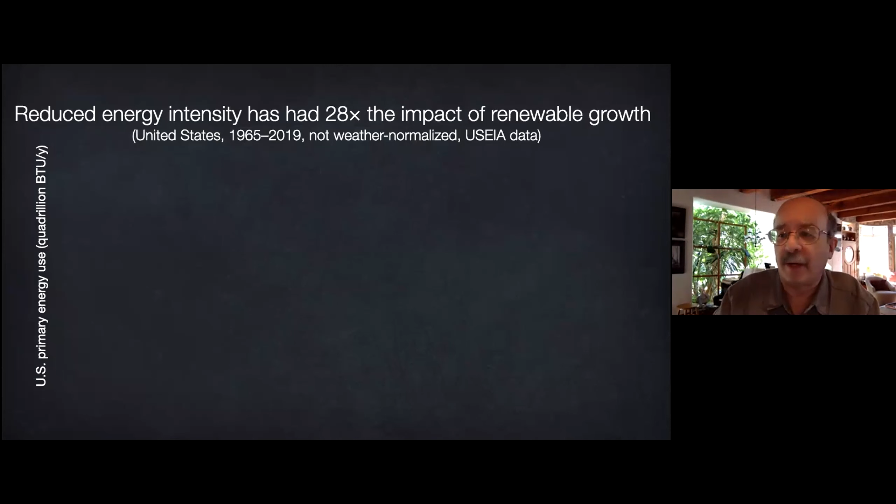For example, if the United States' total primary energy demand had kept growing in lockstep with GDP since 1975, we would have used this much energy. Instead, we cut that use by more than half, saving cumulative energy equivalent to 25 years of current use. Meanwhile, renewable energy output doubled, yet with 28 times less cumulative impact than the savings.

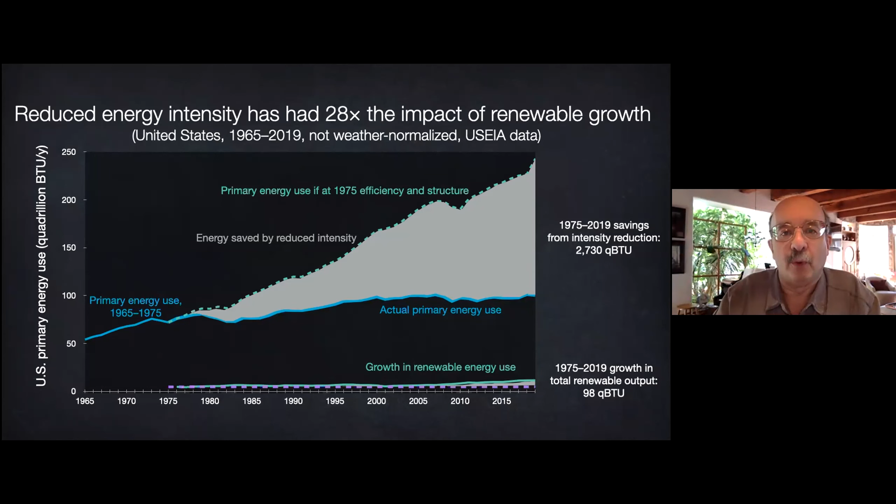Renewables get virtually all the headlines because they're visible, while energy is invisible, and the energy you don't use is almost unimaginable. Yet in, say, 2010 to 2016, the world's saved energy avoided 3 times as much CO2 as all the growth in renewable and nuclear output. Another bit of history: around 1975, US government and industry all said that energy productivity—the real GDP produced per unit of primary energy used—could never go up.

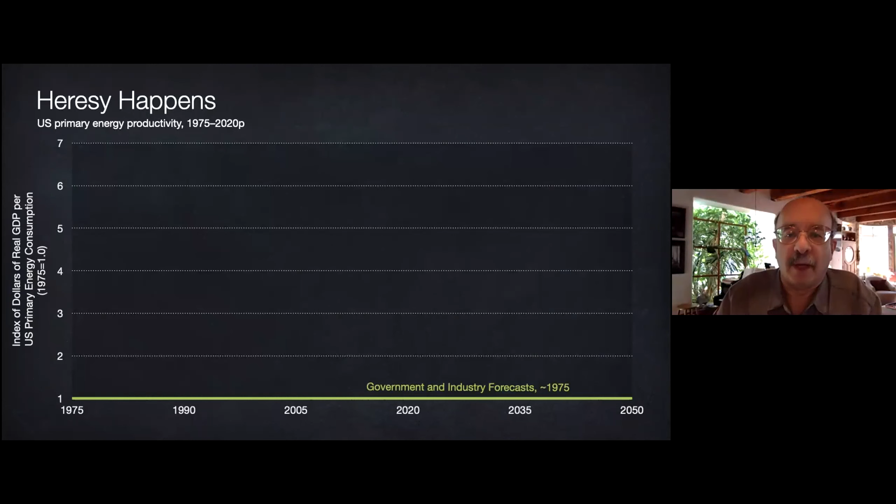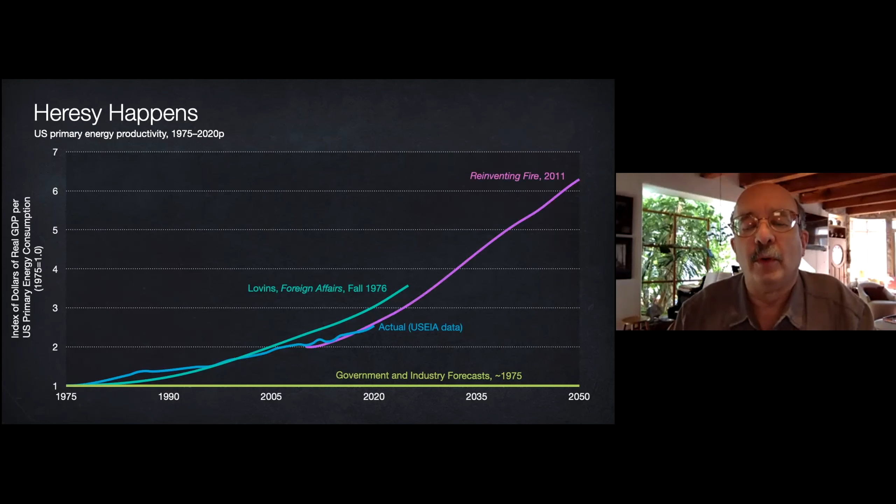A year later, I heretically suggested it could rise 257% in the next 50 years. So far, it's risen 154% in 44 years. Yet just the innovations already added by 2010 can raise energy productivity by another threefold, twice what I originally thought, at a third the real cost.

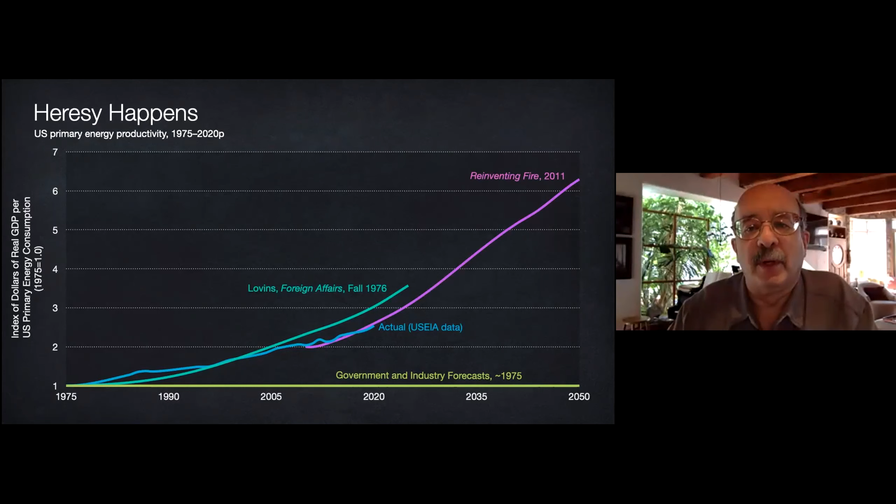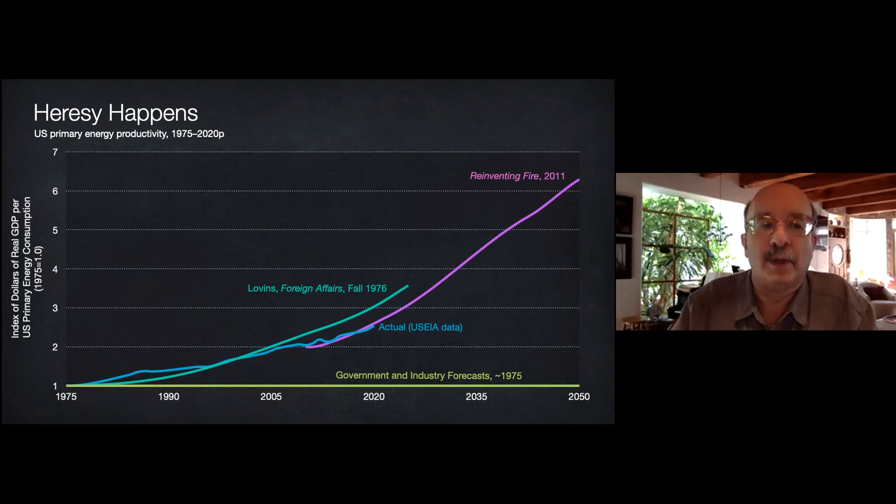And today that's looking conservative because optimizing buildings, vehicles, and factories as whole systems, not as piles of parts, can often make very big energy savings cost less than small or no savings, turning diminishing returns into increasing returns. This paper, free online—just search on the title with a fun 4-minute video abstract—explains why making energy savings several-fold bigger can actually cost less, because it uses not more but fewer devices, and not fancier but simpler devices, more artfully chosen, combined, timed, and sequenced.

Metal ore bodies and oil reservoirs are finite and depletable assemblages of atoms, but energy efficiency resources are infinitely expandable assemblages of ideas, depleting only stupidity, a very abundant resource. A few examples.

My wife Judy and I live here at 7,100 feet elevation in Old Snowmass near Aspen, Colorado, where temperatures used to dip as low as minus 47 F, and we've seen 39 days of continuous midwinter cloud. But our house does no combustion.

That's so 20th century. Super insulation, ventilation, heat recovery, and big super windows insulating like 16 or even 22 sheets of glass, but looking like 2 and costing less than 3, make this building 99% passive solar heated, 1% active solar. Super efficiency added less construction cost than eliminating the heating system subtracted.

So we saved altogether 99% of space and water heating energy, 90% of household electricity, and half the water, altogether with a 10-month payback in 1983.

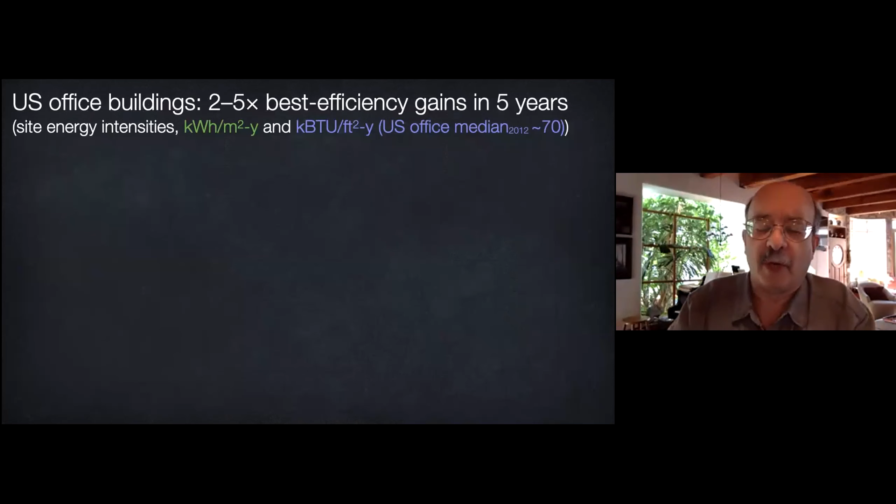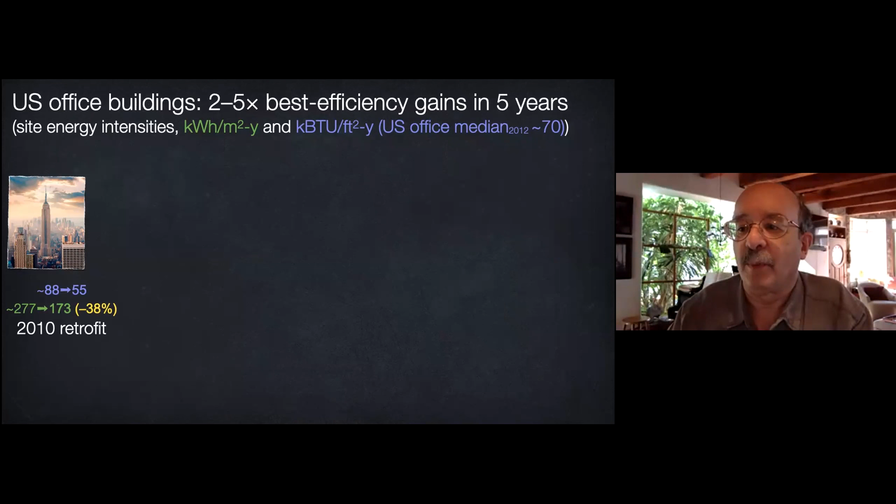We used integrative design in 2010 to retrofit the Empire State Building, saving 38% of its energy, later 43%, with a 3-year payback. This was considered pretty good until 3 years later, our cost-effective Denver retrofit saved 70%.

The Denver retrofit made the century-old federal complex more efficient than what was then the best new US office, which in turn is only a third as efficient as RMI's passive net positive, no mechanicals innovation center 10 minutes from here.

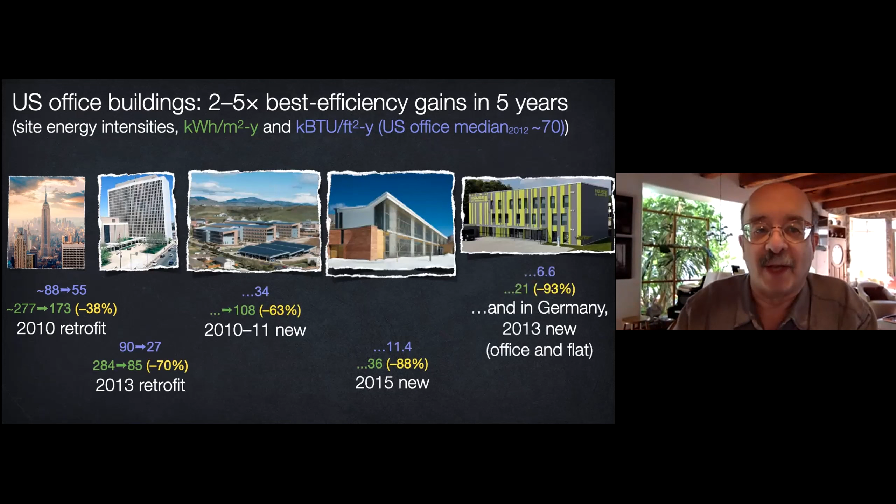And now there's a Bavarian building using 2/5 less than ours. So its 3 stories are powered nearly 5 times over by just its rooftop photovoltaics. Yet all of these technologies existed over a decade ago.

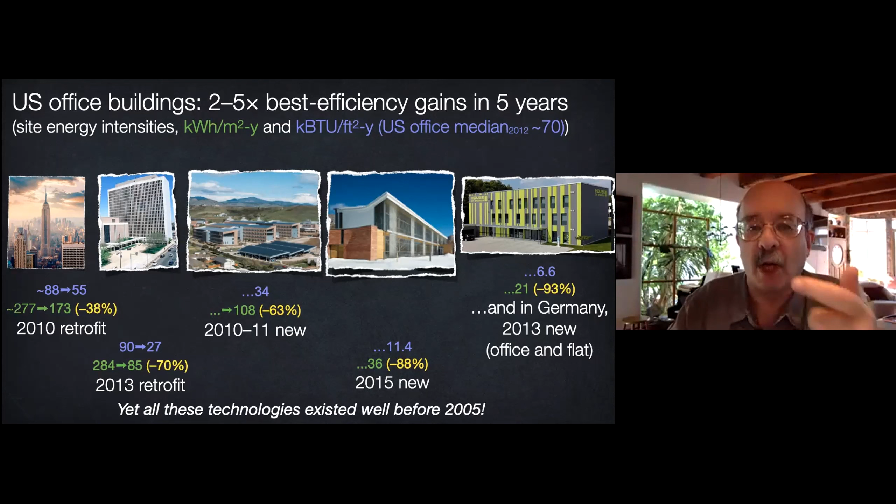What's mainly improved, doubling new and old offices' potential efficiency targets in 5 years, is not technology so much as design, the way we choose, combine, time, and sequence technologies.

So how did our retrofit save 2/5 of the Empire State Building's energy? Well, remanufacturing its 6,514 windows on site in a temporary window factory set up on a vacant floor into super windows that pass light but block heat, plus better lights, office equipment, air handlers, and so on, cut the maximum cooling load by a third.

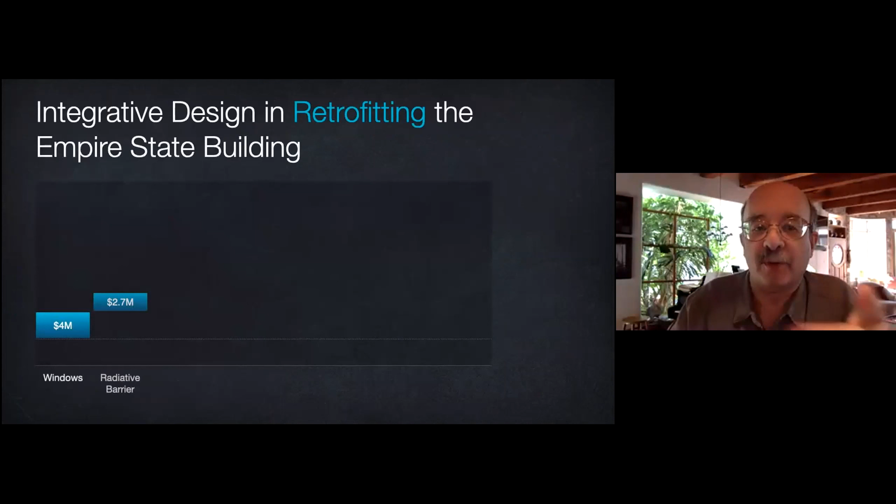Then renovating smaller chillers instead of adding bigger chillers saved $17 million of capital costs, paying for most of those improvements and cutting the payback to 3 years, or under 1 year if we had counted non-energy benefits to the owner or tenants.

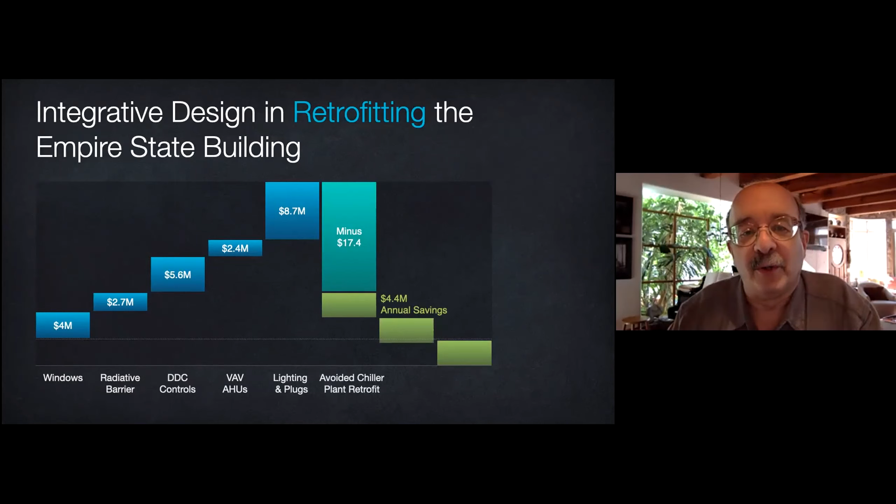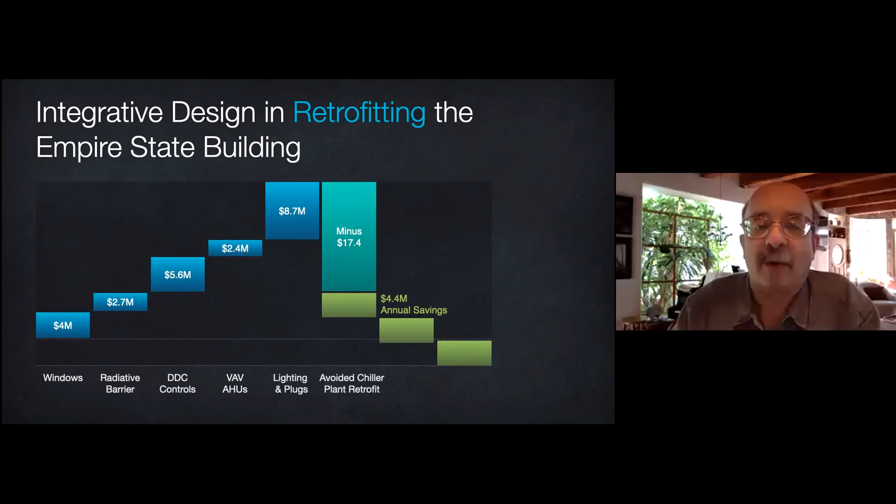A big energy service company using disintegrated design had offered the same 3-year payback with only a sixth the savings we got. They lost the bid. And now the owner is going back with even better integrated design to save another 40%.

Of the 20 most efficient commercial buildings in North America, RMI's Innovation Center, you just saw, was the most efficient in the 2 coldest climate zones, using 1/6 of the median US office energy.

It keeps people cooled by 11 and warmed by 10 passive methods, none of which blows hot or cold air at you. My favorite space is the 270 square foot negamechanical room, where I want to sneak in one night and outline on the floor in yellow industrial tape, like bodies at a crime scene, where the boilers and chillers were supposed to go before we designed them all out.

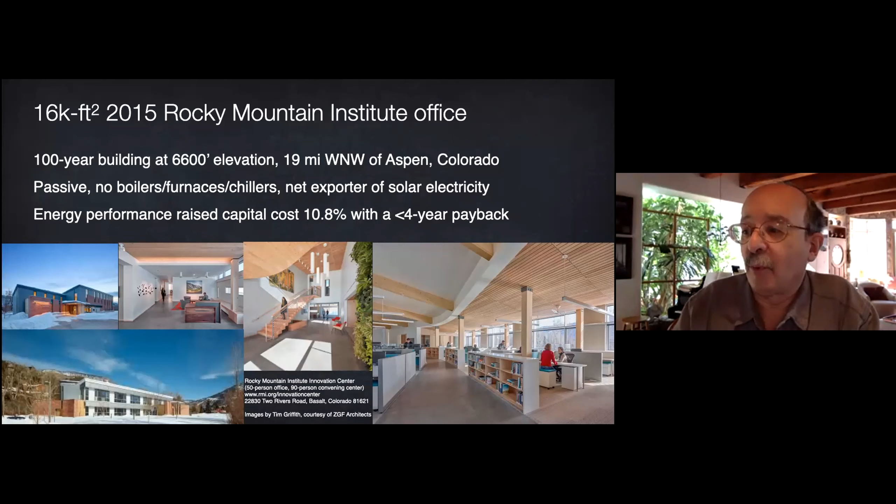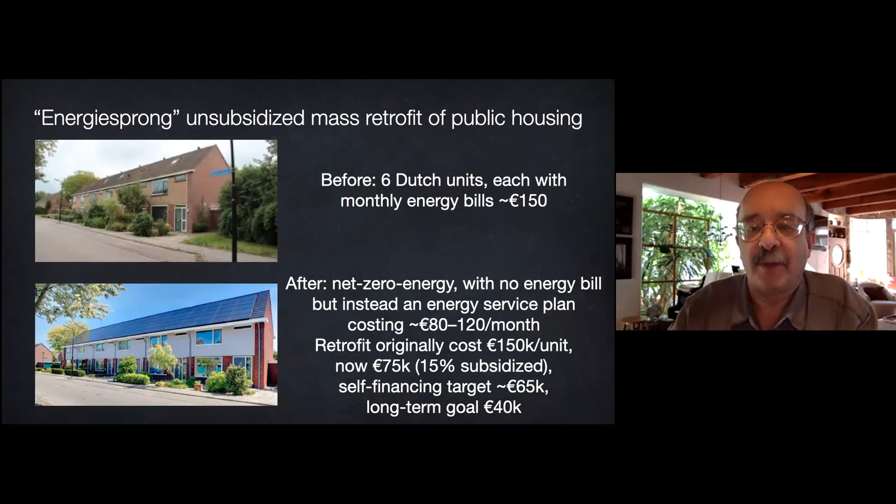RMI's Realize collaboration with DOE and California Energy Commission is adapting such methods to the US, starting in California and Massachusetts. In muggy India, Rohan Parikh's team built 1.5 million square meters of offices using 80% less energy than normal.

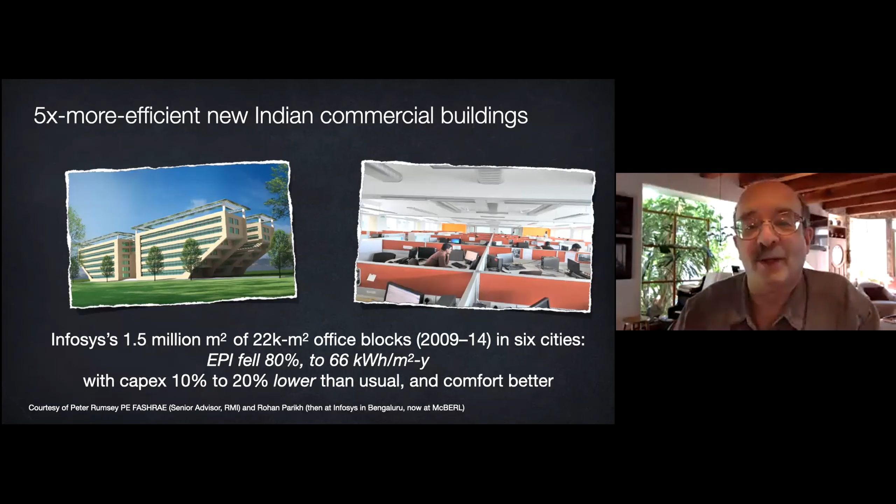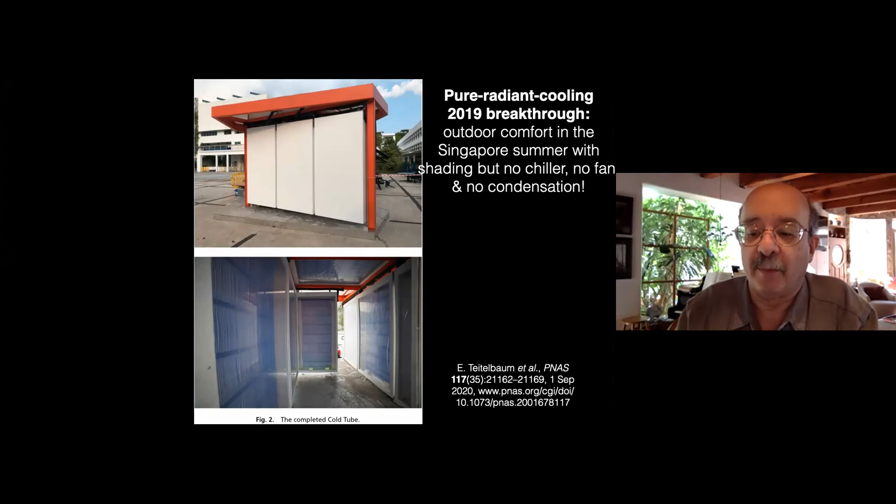About a decade after those buildings, new techniques are emerging. For example, purely radiative cooling can keep people comfortable outdoors in humid Singapore at 90+ Fahrenheit without moving, drying, or cooling the air. In a shaded, open-ended pavilion like a bus stop shelter, this experiment cooled people just by absorbing far infrared radiation from their bodies into vertical panels cooled by surface tubes circulating slightly cooled water. To prevent convection and condensation from ambient air, the front of the panel is shielded by an air gap and a 50 micron polyethylene film, transparent to 82% of the infrared your body radiates.

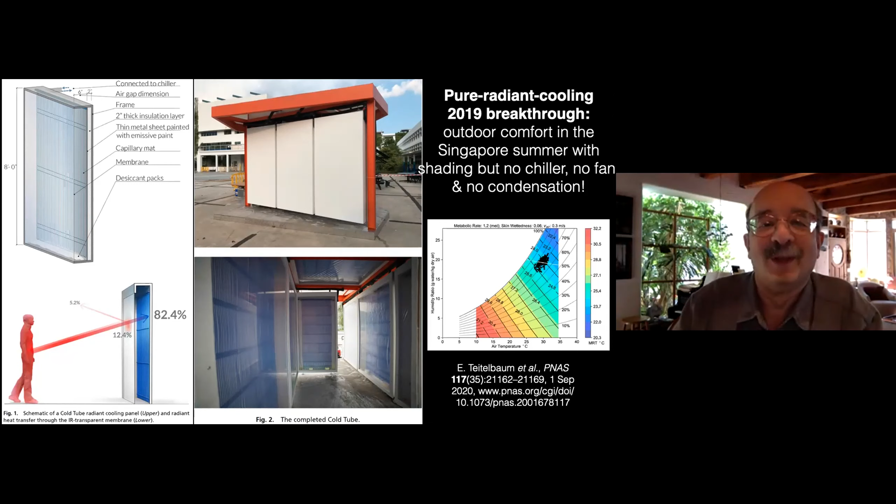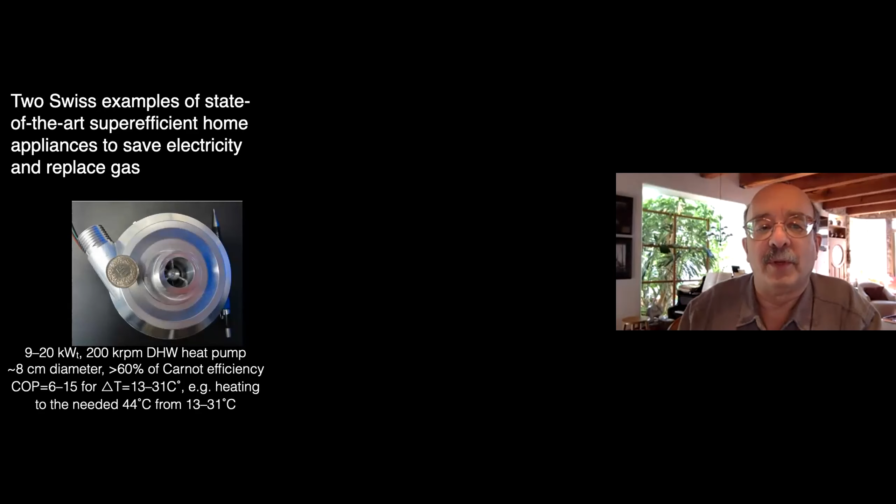What about home appliances, especially to get off gas? This Swiss fist-size high-speed heat pump can deliver 6 to 15 units of hot water per unit of electricity. And this dramatically more efficient, safe, and otherwise superior Swiss electric cooking system uses vacuum insulated pots to cook with 2 to 4½ times less electricity than induction cooktops use.

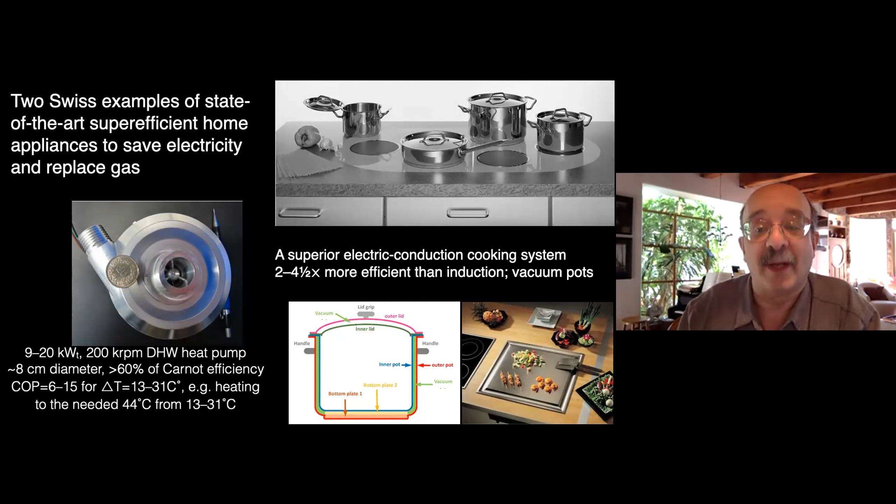In the US by 2050, at historically reasonable speed, buildings which use 3/4 of electricity can become 3 or 4 times more efficient, saving $1.4 trillion net present value with a 33% internal rate of return. So those savings are worth 4 times their costs. And industry can accelerate too, doubling its energy productivity with a 21% IRR.

Indeed, industrial process heat and heavy transport are not uniquely hard to decarbonize, just differently hard, and can even do so profitably, as my new RMI and forthcoming MIT Sloan Management Review papers will show.

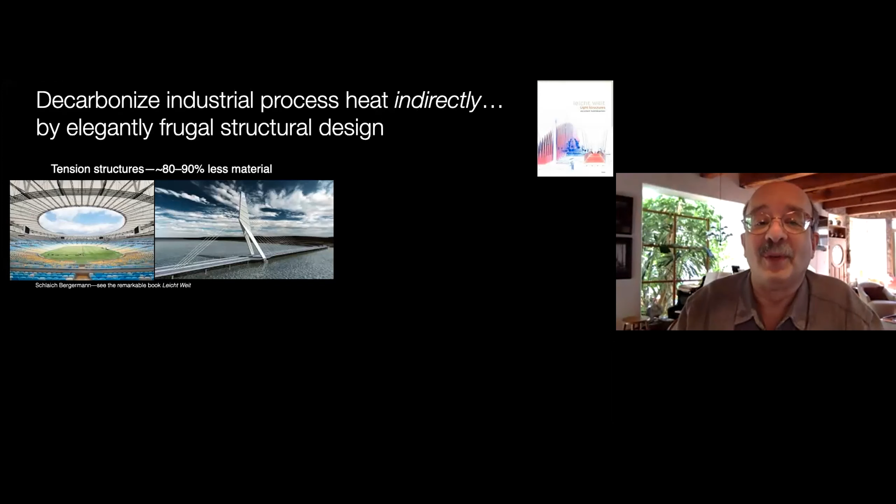Now, industry uses half the world's energy and electricity, dominantly to make stuff. But I found that smarter structural design can profitably save at least half the world's cement and steel that now release 15% of CO2. For example, substituting tension for compression structures typically gives better strength, aesthetics, and cost with about 1/8 the tons. Fabric forms permit optimal shapes that can save over half the concrete in beams, sheets, and other common shapes to deliver the same or better strength and stiffness.

Those weight savings compound because you need less strength to hold up less weight. This folded concrete roof, pre-stressed with carbon fiber, is just 1.6 inches thick, but replaces a 12-inch steel and concrete slab, costs less, and saves 80% of the materials, or 76% redesigned as a floor slab with live loads. It can also help to fit 3 stories with unchanged ceiling height into the vertical space of 2, saving even more structure.

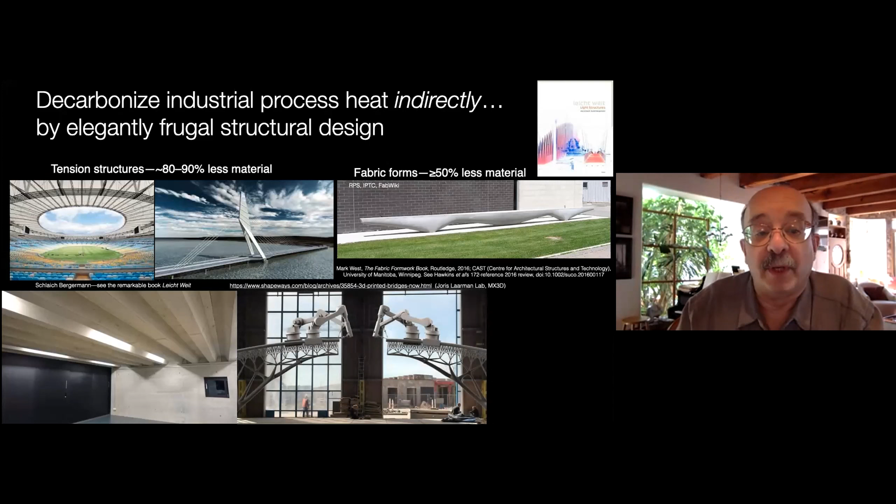This rendering of an airy bridge shows how 3D printing can eliminate most of the weight of concrete structures that mostly support their own weight. This beautiful stainless steel bridge was 3D printed.

Next, substitute natural composites like wood, already in 85-meter towers, planned for 350 meters in seismic Tokyo. Add carbon fiber to save much of the wood or concrete. Apply Taiheiyo's carbon-neutral bamboo concrete, perhaps even adopt carbonate chemistries to make cement a net absorber of CO2.

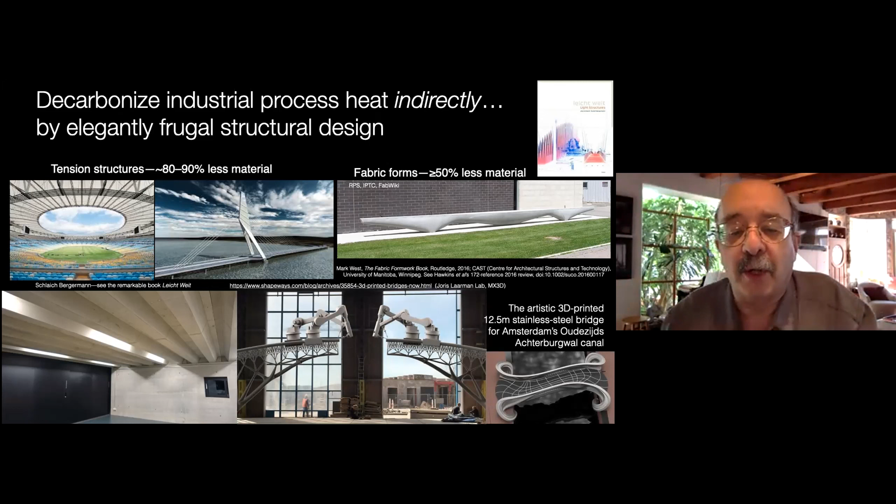Our new build projects generally found about 40 to 90-odd% savings with lower than normal capital costs. These are both across a wide range of old and new industries. Here's one of those data points.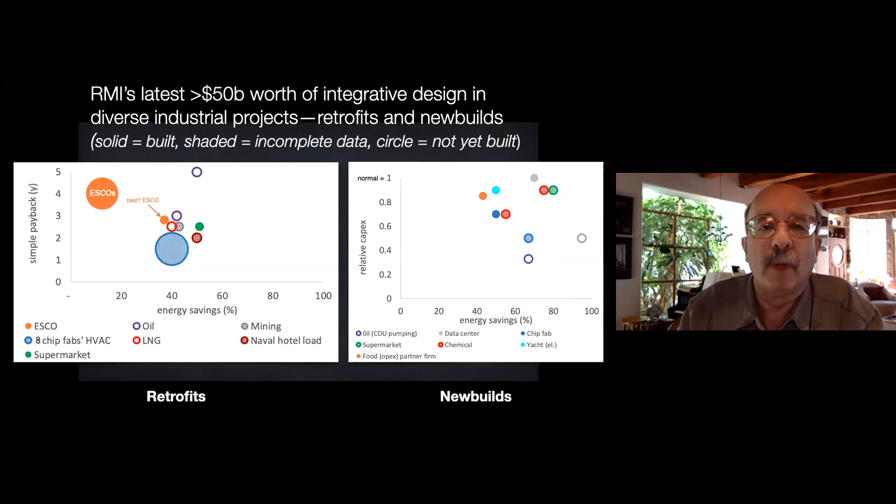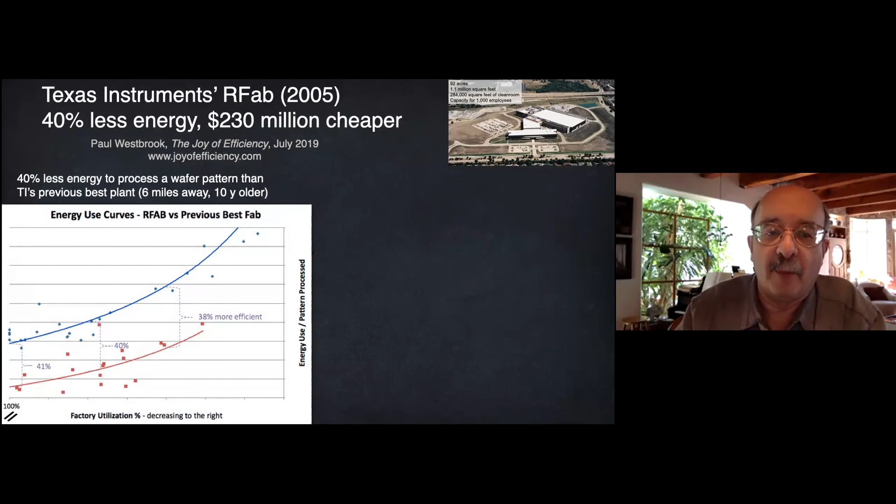Paul Westbrook and I co-led the redesign of Texas Instruments' new semiconductor wafer fab to use 40% less energy with 30%, or $230 million, lower construction cost. So it got built in Richardson, Texas, not in China. Its system efficiencies eliminated one of the 2 utility floors. As of 2017, it had inspired cutting the company-wide TI chip-making energy intensity by 62%, water 56%, greenhouse gases 57%.

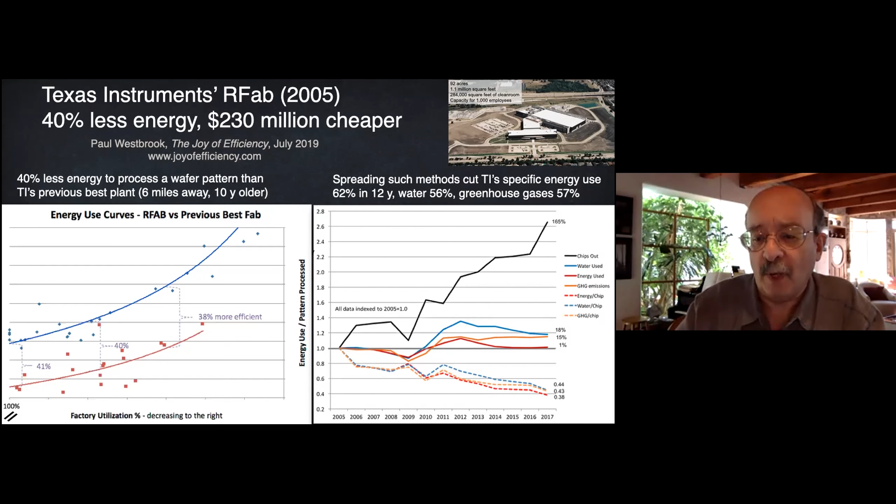RMI's next wafer fab design, by the way, showed how to save about 2/3 of its energy use, not counting tool improvements, and half its capital cost, while replacing all 22,000 tons of chillers with any of 3 natural cooling methods that can yield upwards of 100 units of cooling per unit of electricity.

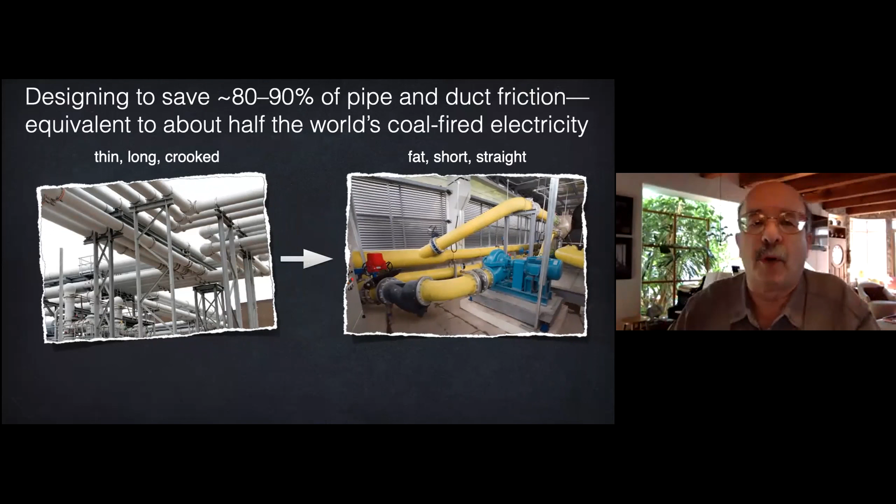Just better pipe and duct design, saving about 80 or 90% of friction and therefore pump and fan power, could, if fully deployed, save roughly half the world's coal-fired electricity, with paybacks typically under a year in retrofit and instant in new build. But this isn't yet in any standard engineering textbook, official study, engineering forecast, industry forecast, or climate model. Why not? Because it's not a technology, it's a design method.

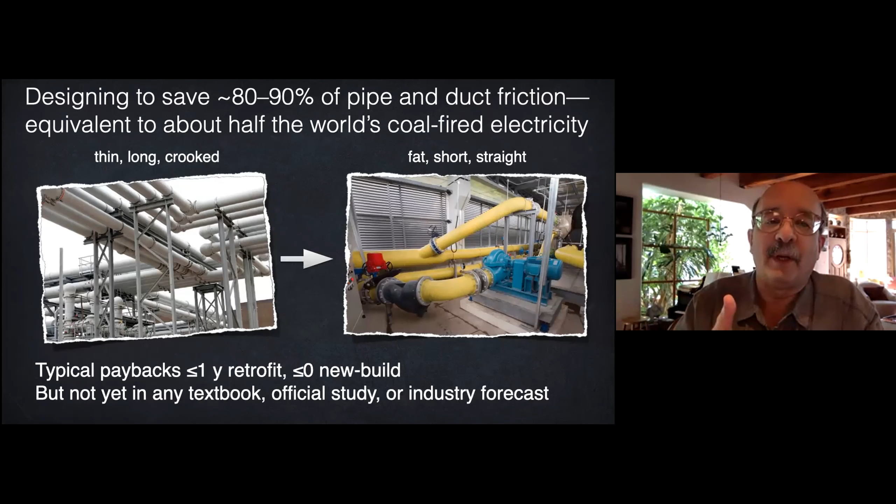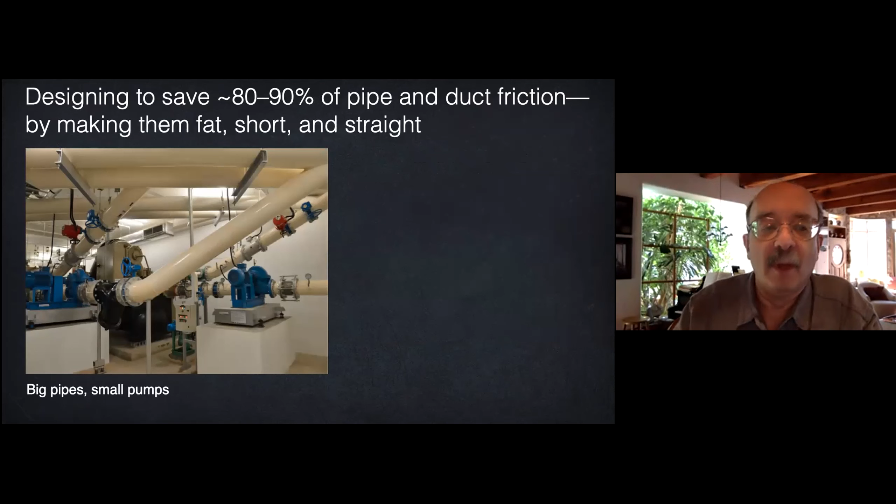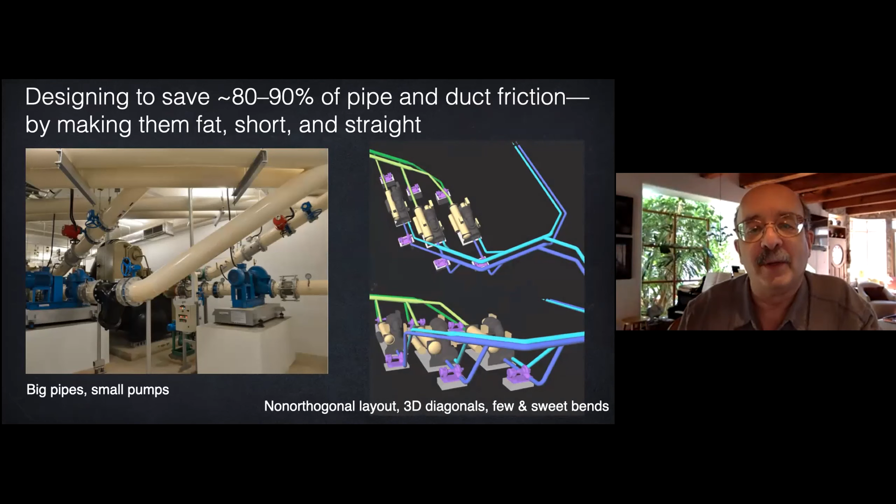Few people yet think of design as a scaling vector, a way to make things big fast. To wring out friction, we simply use big pipes and small pumps, not small pipes and big pumps. And to eliminate elbows, 90-degree angles and their friction, we lay out the pipes first, then the equipment, laying out supply pipes as if they were drains.

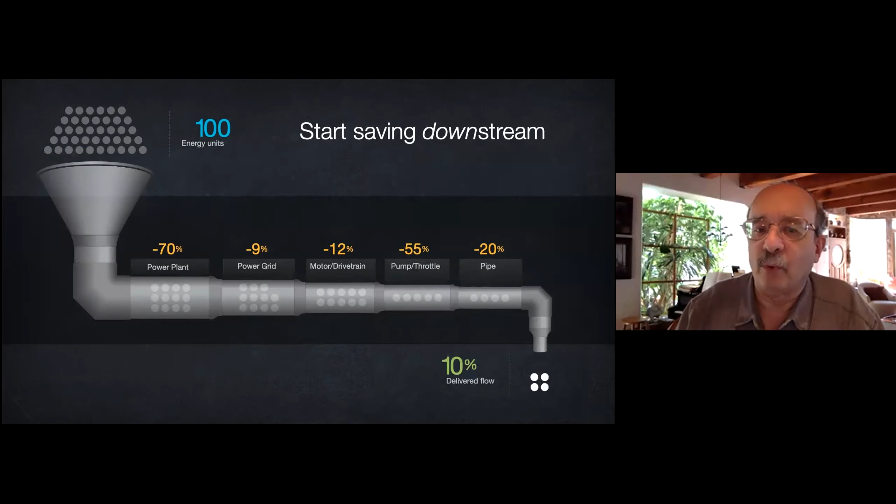We bend minds, not pipes. So what does such savings mean for the 3/5 of global electricity that's used in motors? Half of that runs pumps and fans. Well, in a typical pumping system, from the fuel burned at the power plant to the end use, many successive losses compound. So only 1/10 of the energy in the fuel comes out the pipe as flow.

But now turn those compounding losses around backwards into compounding savings from right to left, and every unit of flow or friction you save in the pipe saves 10 units of fuel cost, emissions, and global weirding back at the power plant. And as you go back upstream, the components get smaller and cheaper, so the total capital cost goes down.

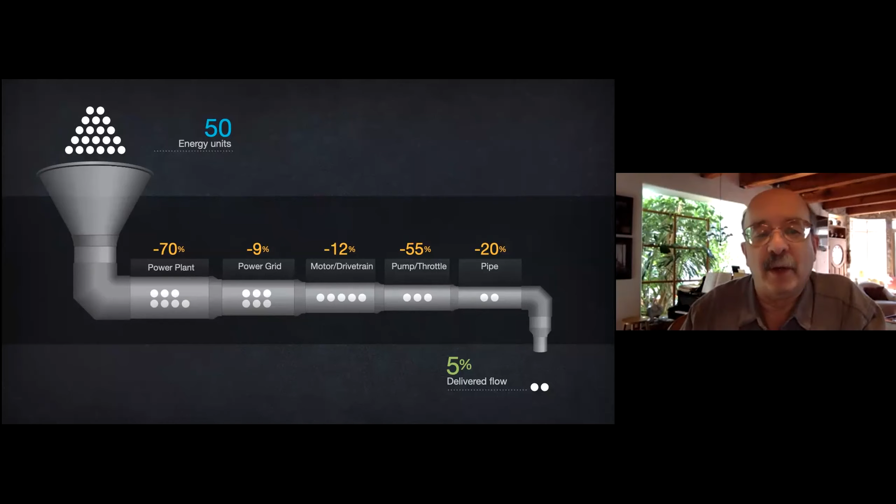Then we can make the drive systems, the motor systems, 80 or 90% smaller and at least twice as efficient by a whole system retrofit using not just the usual 2 improvements, but 35, of which 28 are free byproducts of the first 7. And you end up saving several fold more drive energy at about 1/5 the unit cost.

Even with limited integrated design, US electricity use could shrink 25% by 2050, despite all electric autos with a 2.6-fold bigger GDP. This quadrupled electric efficiency would cost 1/10 our current price of electricity. It would cost on average under 1 cent per kilowatt hour. That vast overhang of unbought efficiency holds at risk many power plant, fuel, and grid investments.

And indeed would do the same to many of the investments proposed in the Princeton study Eric described, because it had only exogenous efficiency, not competed against supply. And they ended up with 2 to 4 times the 2050 US electricity use that our analysis did for essentially the same GDP. It's within a few percent, because we looked really thoroughly at efficiency, and their study made some very simple, moderate assumptions.

Which rather disappointed me because Princeton has a fabulous heritage of pathfinding work in efficiency. But I think a lot of the challenges that showed up in their very granular supply side analysis flowed from needing 2 to 4 times as much electricity as we found.

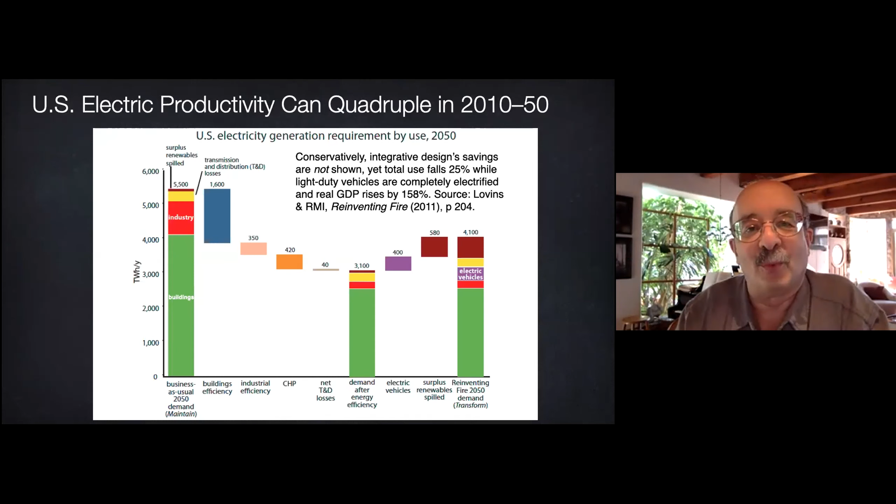And we didn't anywhere near buy as much efficiency as was worth buying. Now, the same whole system design that we apply in buildings and industry can also make cars several fold more efficient, making electrification faster and cheaper. Most of the energy needed to move a car is caused by its weight.

Saving 1 unit of electricity at the wheels leverages 5 or 6 units of fuel saved in the tank, because you don't need to waste 4 or 5 units getting that energy to the wheels. So this carbon fiber electric car that I drive made money from the first unit off the assembly line 8 years ago. Its carbon fiber was paid for by needing fewer batteries to move less weight. Fewer batteries also recharge faster.

An integrated design makes saved weight snowball far more than other automakers assumed. The assembly is also radically frugal, helping again to pay for the carbon fiber. And this method of manufacturing eliminates the conventional body and paint shops, the hardest, costliest steps in making a car. It's much better for workers.

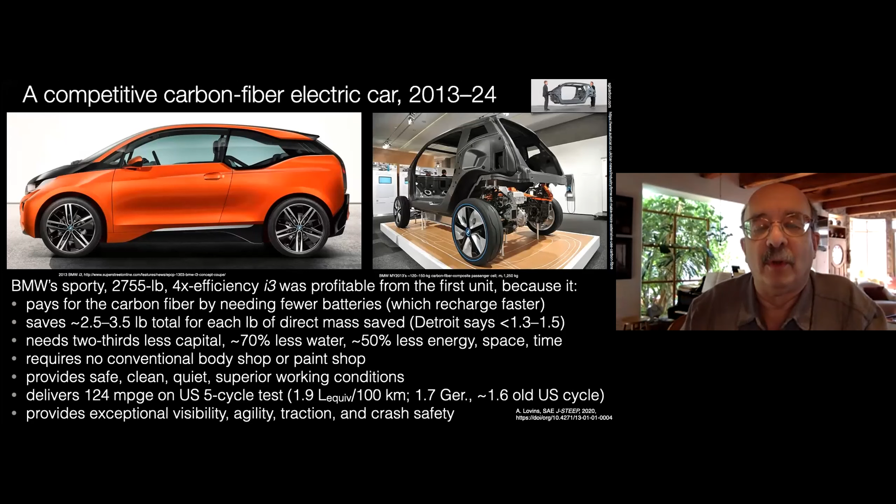Its quadrupled efficiency, equivalent to 124 miles a gallon, is uncompromised and brings many driver benefits. Analyzing auto efficiency by the part, not by the vehicle, which is the way we buy it, conceals most of this opportunity to save several times more energy more cheaply than current official policy and regulation assume.

2 hypercars plan to enter the market late this year. Disclosure, I advise both these firms, will change the game again.

Most drivers will not need to recharge this 2-seat electric 3-wheeler because its topside solar cells capture enough energy to drive about 20 to 40 miles a day. It's as if your present car magically added 2 gallons of fuel to its tank every day you park it outside.

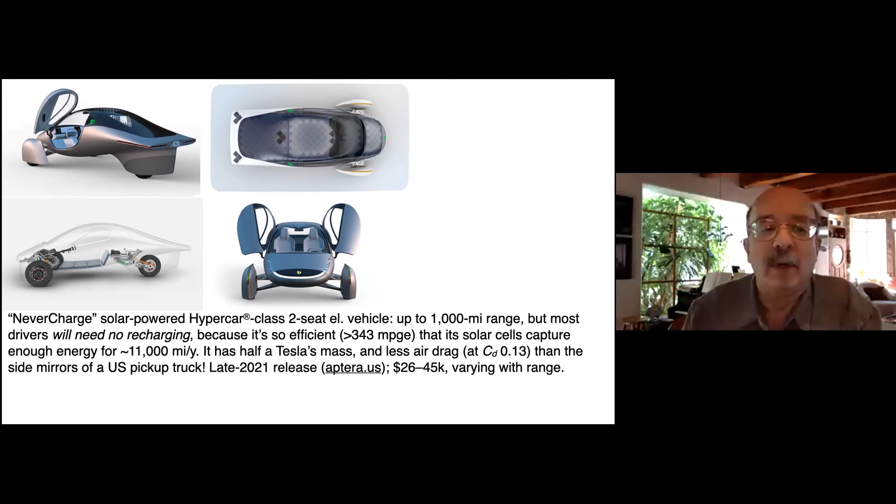To make a long road trip, you can quickly recharge the batteries with household electricity for ranges up to 1,000 miles. My BMW and Tesla electric cars outside are among the most efficient now sold, but this carbon fiber 2-seater will nearly triple their efficiency to more than 343 miles per gallon equivalent. Its carbon fiber body looks very crash-worthy.

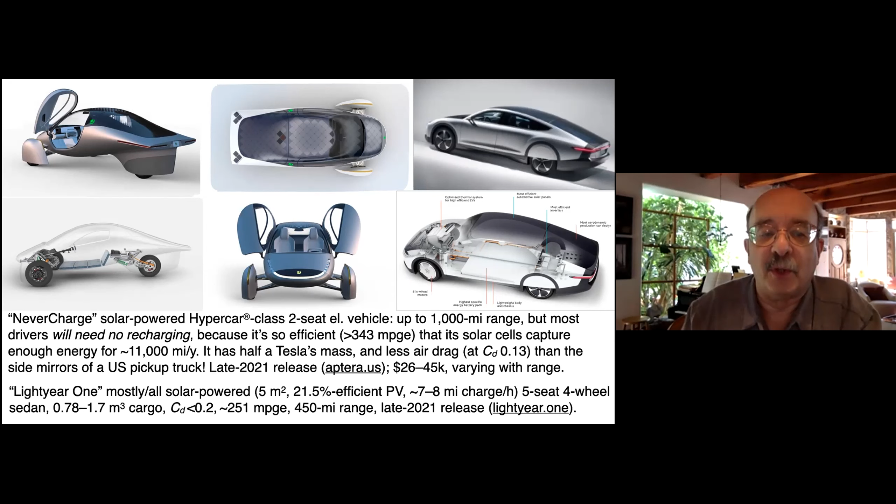Then there's Dutch firm Lightyear's 5-seat, 4-wheel, 450-mile range, light aerodynamic car with 5 square meters of solar cells on top, 251 mile per gallon efficiency, and therefore it can add 8 miles of range per hour in the sun. So the charging infrastructure that other EVs must pay for, these super efficient vehicles aim to bypass.

The same design principles apply to heavy vehicles. My team have helped Walmart's fleet of heavy trucks, the world's biggest civilian fleet, save half its fuel use per case in a decade, including smarter logistics.

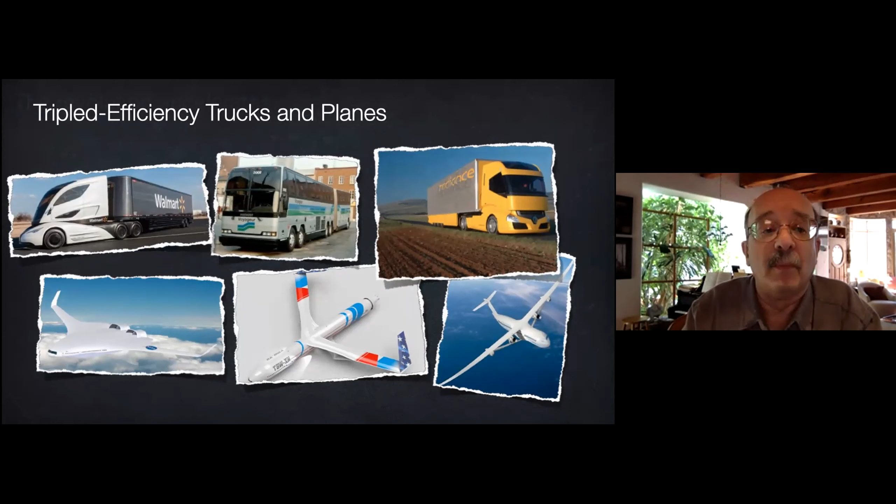But better technology alone can profitably make heavy trucks at least 3 times more efficient, as one maker expects to prove this year. Airplane efficiency also can rise 3 to 5-fold, like these decade-old designs in the bottom row by Boeing, NASA, and MIT. Tesla's battery electric heavy truck, also due out this year, more than triples efficiency with 40% sleeker aerodynamics, lightweighting that offsets battery weight, and a 2-year payback.

Thousands of such identical shells or cells, molded from engineering plastics or from alternatives 10 to 100 times stronger, can be robotically assembled into an airplane of any desired shape, opening revolutionary prospects for lightweighting, aerodynamics, and lower cost. It's been prototyped as a car for Toyota, as an airplane for Airbus.

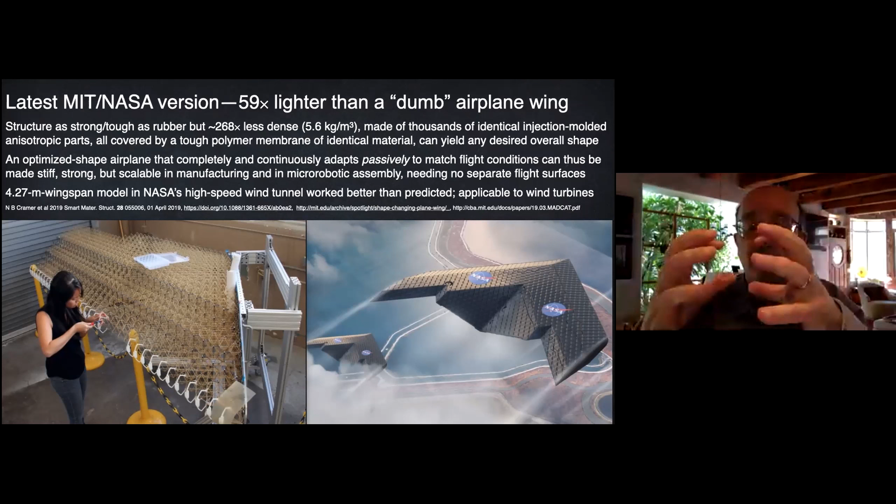It could make a vacuum balloon needing no helium, crush-proof, but buoyant enough in the atmosphere to lift 24 times the payload of a jumbo jet. Put some vacuum balloon in a lattice airframe to help carry improved batteries, and PV-powered zero-emission electric planes, thinks one inventor, might ultimately carry commercial payloads across oceans.

So the oil reserves unsellable for competitive reasons look bigger than the reserves unburnable for climate reasons, putting oil owners even more at risk from market competition than from climate regulation.

The cost of getting autos completely off oil has fallen from $18 per saved barrel a decade ago to under $7 a barrel today, heading below zero in the next few years. So oil became uncompetitive even at low prices before it became unavailable even at high prices.

With electricity, as with fuels, technology and design are both moving efficiency into fast forward. Prior lighting improvements are being swept away as LEDs in each decade get 30 times more efficient, 20 times brighter, 10 times cheaper. What else changes this fast?

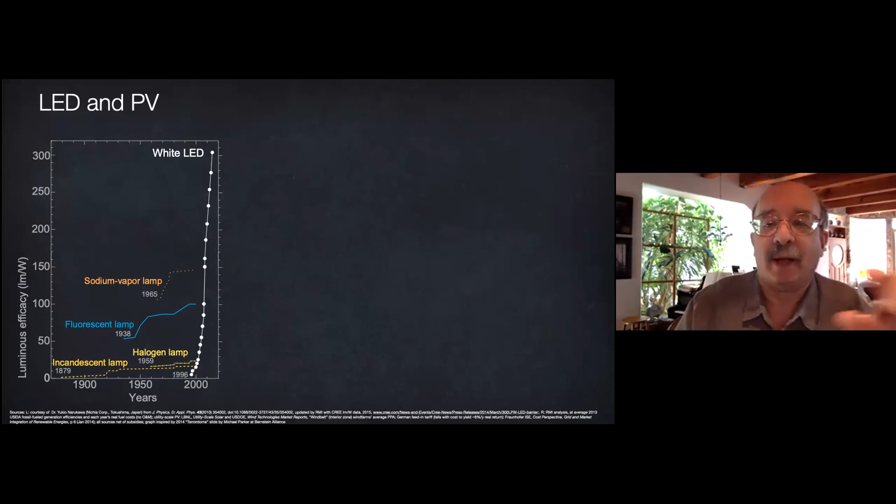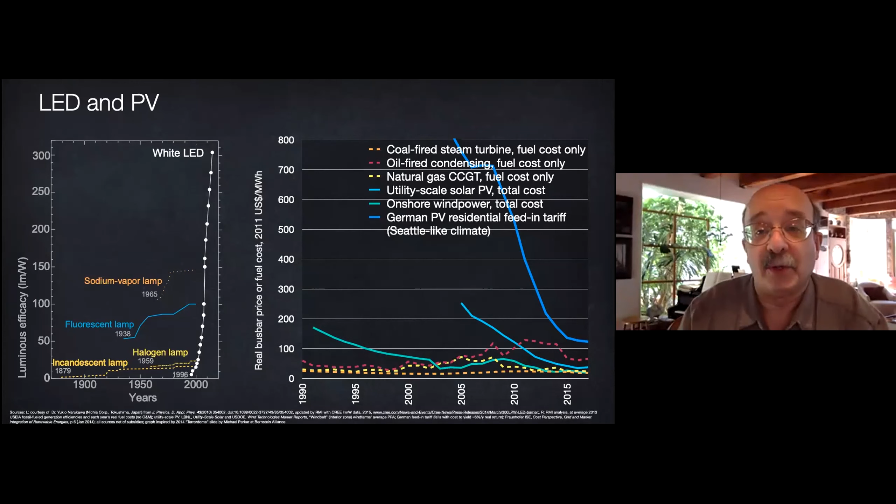The rest of the energy transformation, modern renewables. LEDs backwards are PVs, photovoltaics, and solar and onshore wind power costs have plunged below the dashed lines. The cost of fossil fuels fed into US power stations is often making old coal and gas and nuclear plants uneconomic just to run.

The electricity revolution, though, is much more than that. It includes shifting from molecules and atoms to bits and packets, from hardware to software, from hierarchies to networks. Electricity is changing from centralized, supply-focused, fossil and uranium-fueled and brittle to distributed, customer-focused, renewable, and resilient. Perhaps its deepest change is how the information age informs, enables, and organizes customers to take power into their own hands.

You know, it's wise to sell customers what they want before someone else does. Customers are figuring out they can buy a lot fewer electrons, use them more productively and timely, produce their own, and even trade them with each other.

Powerful disruptors are converging on the electricity industry from at least 8 directions. These 8 Pac-Men of the apocalypse move fast. They don't just add, they exponentiate. They're not lone wolves, they hunt in packs. They multiply quickly, and they can gobble half of utility revenues in this decade. Together, they're creating an alien competitive landscape faster than most utility cultures can cope.

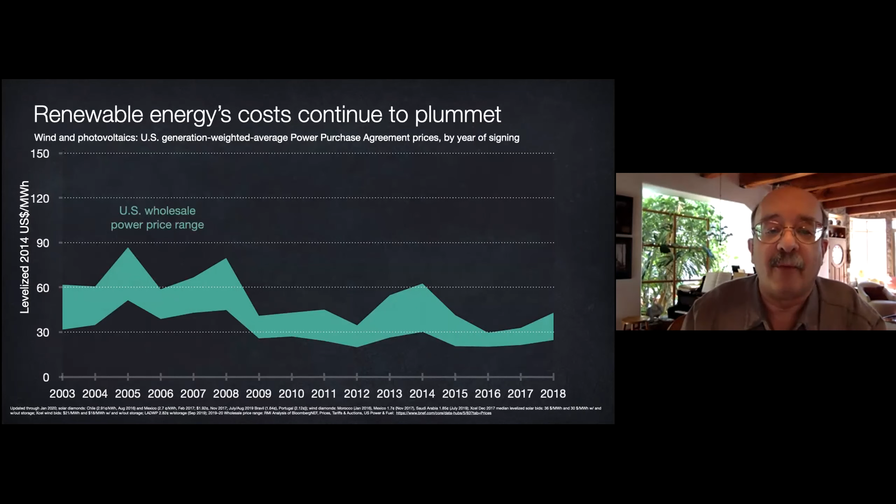In the US, our wholesale electricity prices in aqua now widely exceed the average long-term contract prices of wind in blue, solar in orange. Those are temporarily subsidized, but less than non-renewables. In unsubsidized world markets, renewables at or below $30 a megawatt hour, the diamonds, keep falling, through 20 to now 17 or less, even 13. And in this decade, they should reach 10 or less.

Modern batteries, included in the filled squares, are already cheaper than gas peakers. Bloomberg finds variable renewables plus backup, which could be renewable, non-renewable storage or demand side, are now the cheapest way to meet a steady load, dethroning so-called baseload thermal plants.

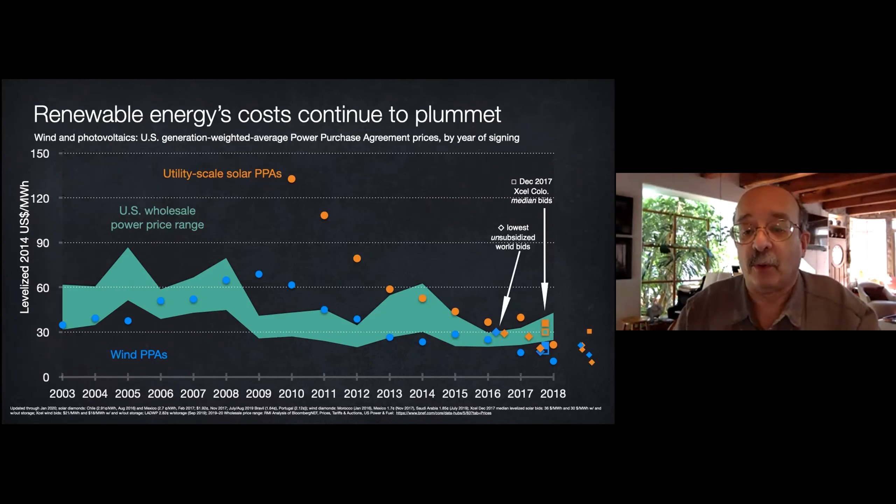The Paris Agreement's 1.5 Celsius degree aspirational goal would require 80% of 2010 coal-fired electric generation to stop by 2030, closing one plant a day to 2040, and virtually all by 2050. But renewables' new market prices make this profitable without counting mitigation benefits.

So using efficiently structured financial instruments to close and replace all coal plants now with modern renewables, including battery storage, would thus be cost neutral in 2 years and would save over $100 billion a year by 2025, just in private internal cost.

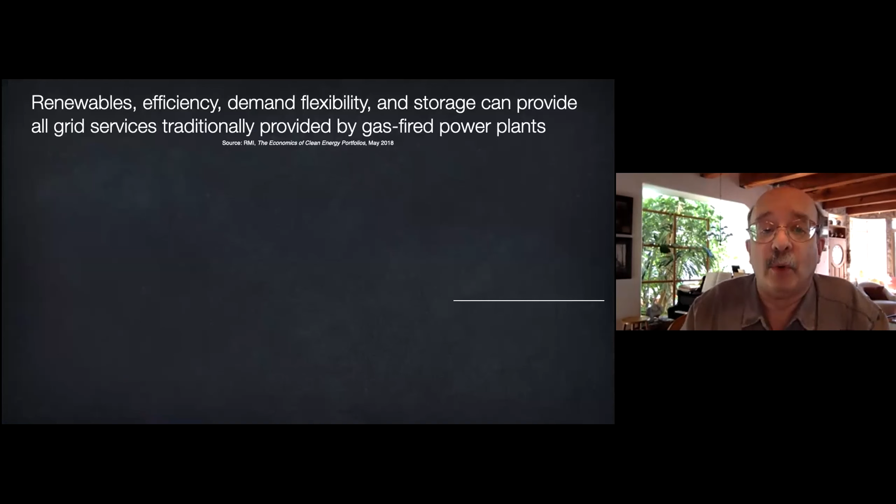Gas comes next. New and old combined cycle gas plants no longer have a business case, even with fracked gas. Their market is collapsing because all their outputs, energy and capacity, ramping and flexibility, and ancillary services like voltage and frequency stability, can all be provided faster, better, and cheaper by locally customized carbon-free clean energy portfolios, melding demand-side renewable and storage assets. This could strand over $100 billion of planned US gas plants and $500 billion of gas supply to fuel them. Investors have taken note.

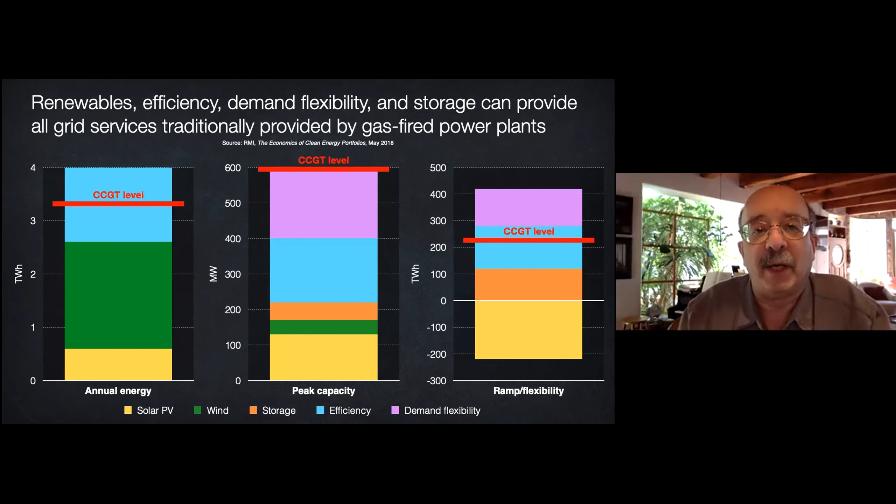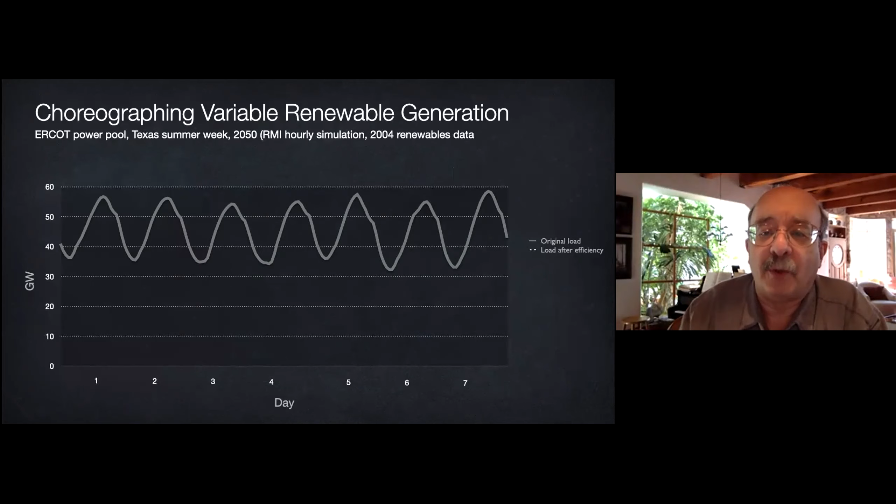How could these moving parts fit together, say in Texas, whose grid, of course, has no big hydro dams and is only 1% interconnected outside the state? Well, a 2050 summer weeks expected ERCOT load shape can get much smaller and less peaky with profitably efficient use, with at least a 10% real return, say the National Academies.

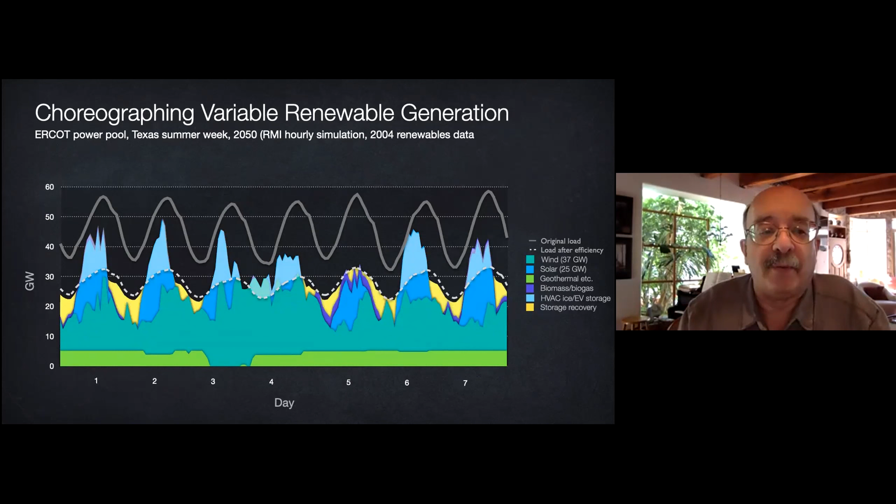Then we can make 86% of the annual electricity with a combination of wind and photovoltaics, and the other 14% from dispatchable renewables. This 100% renewable supply can then match the load by putting surplus electricity into two kinds of distributed storage that are worth buying anyway: ice storage, air conditioning, and smart charging of electric autos, and then recovering that distributed storage when needed and filling the last gaps with unobtrusively flexible demand.

So then you have 100% renewable electricity every hour of the year with no bulk storage and with only about 5% left over, maybe to make hydrogen. So the economics should be excellent even at today's prices, let alone lower future prices. And some grid operators are already doing such choreography today.

Germany and Britain are half renewably powered. The whole European Union was 38% renewably powered last year, surpassing fossil or nuclear generation. Denmark expects to be 86% renewably powered this year. Scotland, 100% - they almost made it last year. And already they and some other European countries with modest or no hydropower are meeting about half to 3/4 or more of their electric needs from renewables, adding no bulk storage, and with superior reliability - for Denmark and Germany, about 20 or 25 times as good as ours.

The ultra-reliable former East German utility, 50 Hertz, was 60% wind and solar powered in 2019. The CEO said they could do 60 or 70% without adding bulk storage. Now they're targeting 100% renewables, all reliably integrated by 2032. So as my colleague Clay Stranger says, the operators have learned to run these grids the way a conductor leads a symphony orchestra - no instrument plays all the time, but the ensemble continuously makes beautiful music.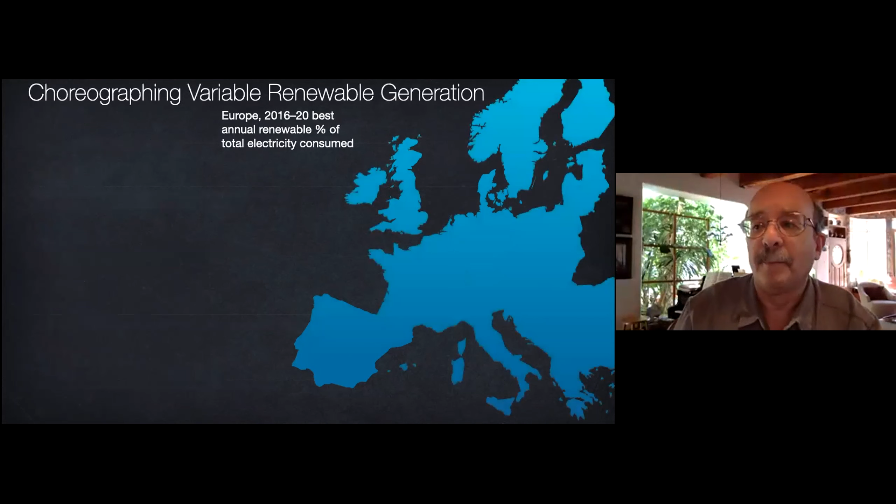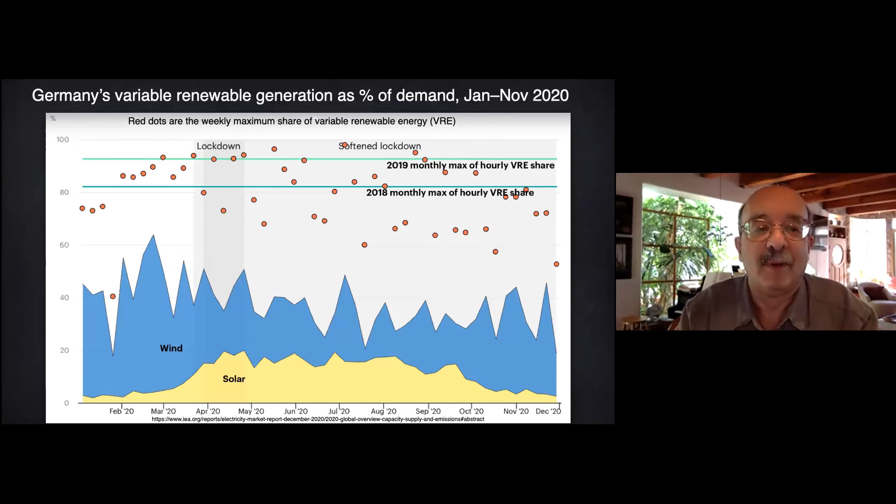Just to underline how this is real and now, last year the maximum percentage of Germany's electricity demand met by variable renewables, PV and wind power, the red dots, exceeded 50% in almost every week, and ranged from 80 to nearly 100% at some point during about half of those weeks. Their nuclear and coal phase-outs continued, the lights stayed on. What can I say? They're German engineers, but we have good ones too.

Now, why did the lights go out in Texas in mid-February? These graphs show in two different styles how the state's electric supply in early and late February had normal operation, with wind in green, solar in yellow, whenever available, displacing gas in light brown and coal in dark brown. But mid-month brought 4 days of blackouts, perhaps the state's costliest disaster ever.

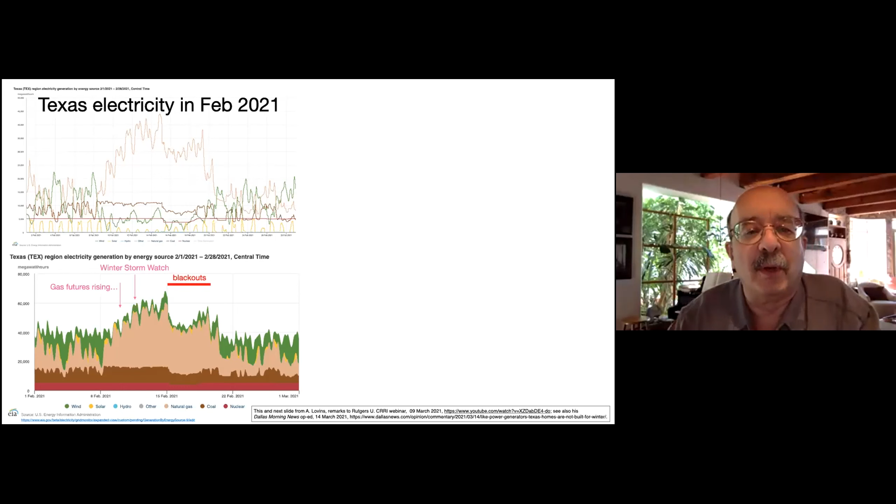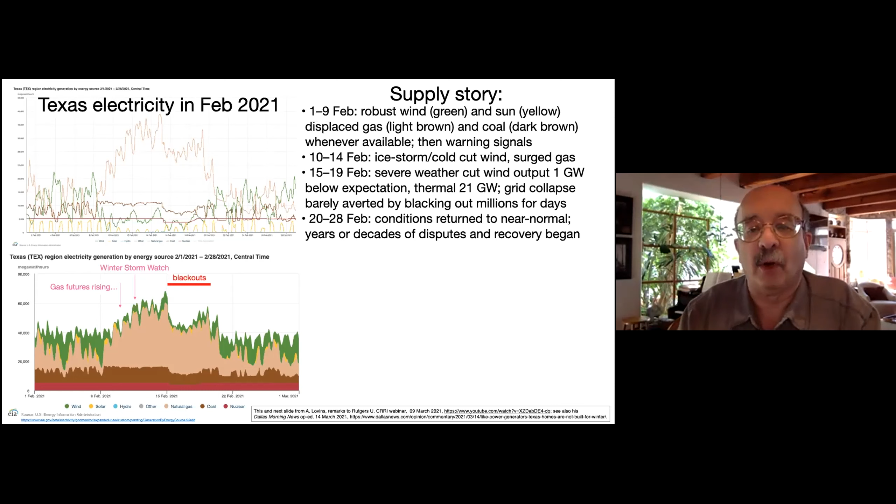Most analyses published focus on the supply side, how two February storms strained and then shriveled Texas's bountiful gas supply by freezing on non-winterized infrastructure, while many electric generators also froze, and then there were interactions between those systems. So for whatever reason, gas plant output fell 17 gigawatts, coal 4, nuclear 1, just missing 3 more, becalmed and frozen wind 13 from nameplate rating, snow-covered solar 1. But the resulting coincident generating shortfall of 34 gigawatts, 21 of it thermal, exposed technical, institutional, and governance flaws that mattered only because of a huge and largely unnoticed demand event.

Intense cold boosted normal loads by an estimated 35 gigawatts of peak electric heating load. That is nearly twice the maximum load ERCOT shed. It's twice the lost gas-fired generation. It's more than the total shortfall in supply. It's nearly half the 77 gigawatt total peak demand that, if met, would have been 2 gigawatts over the summer record. These vast heating loads came from an often inefficient building stock, half of it housing, that's two-thirds electrically heated.

In extreme weather, this fragile combination risks hypothermia or heat stroke, and it endangers all Texans' electric and gas supplies. Now, two-thirds of Texas homes were built before there was a state building code. Half have big air leaks and little or no wall insulation, limited attic insulation, single glazing.

The blackouts could also have been abated, maybe even averted, by asking Texans the day before to turn thermostats and water heaters way down and appliances off, drain their pipes into containers, leave those out to freeze, then put them back into unplugged refrigerators and freezers to preserve food. But customers were only asked late and vaguely and ineffectually to conserve energy, so they didn't know how to help, nor that they held so much power in their hands.

Despite days of advance notice from weather forecasters and gas markets, supply- and summer-focused state institutions proved unprepared to sustain interlocked supplies or to tell retail customers how to mobilize a decisive behavioral rapid response. Instead, leaders blamed each other and scapegoated renewables.

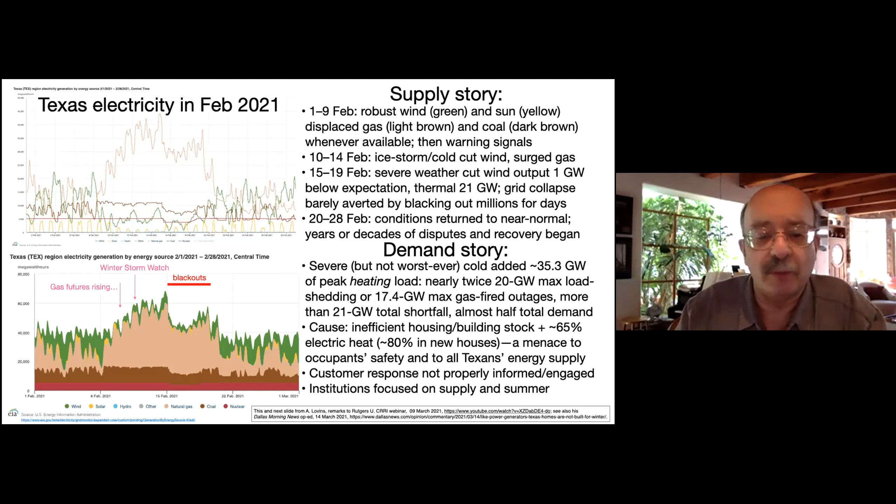Oh, so how did those perform? Well, wind and solar were initially blamed 128 times by Fox News in two days for triggering the ERCOT disaster. So was the Green New Deal, not yet adopted anywhere.

ERCOT initially reported 16 to 18 gigawatts of wind outage, later revised to 13, but that only meant production below full nameplate rating. February is normally a low wind month, so ERCOT's forecast actually included only 7.1 average gigawatts of wind power, or 1.8 gigawatts in the extreme winter peak forecast, plus 0.3 gigawatts solar. So renewables underperformed the contingency expectations by at most 1.4 gigawatts for 1 hour, 18 hours into the outage, while over 30 gigawatts of thermal capacity was down.

Now, of course, winterizing the wind turbines could have been a smart investment to earn astronomical prices in the 80-hour crisis, as Chris Clack's new VCE analysis suggests, but that would have added none to a few gigawatts when most needed, due to forecast and actual light winds.

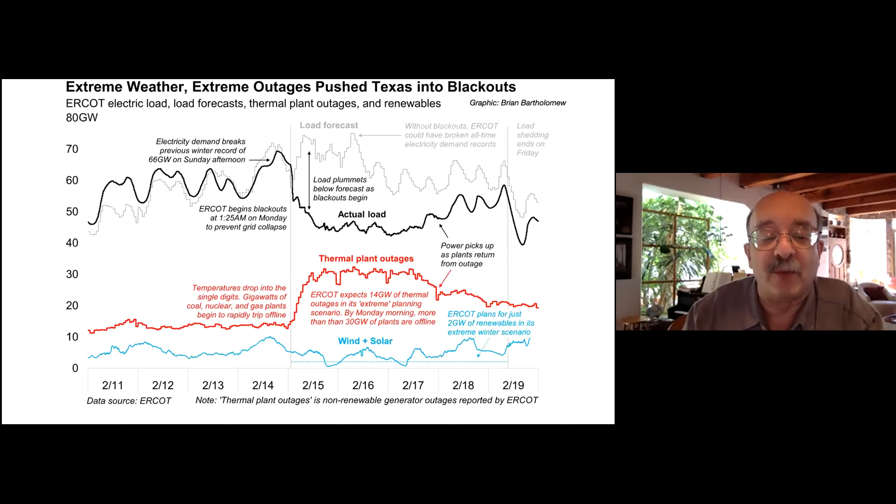Meanwhile, under 6 or 8 inches of snow, the shallow-pitched Austin PVs produced about 60% less on 15 and 16 February, then rebounded. ERCOT solar produced 2 or 3 gigawatts 15 to 18 February, then 4 or 5 the next week, while wind returned to a robust 12 to 20. So look who was most resilient.

Now, for normal grid balancing, we have not just one way, bulk storage in magenta, but about 9 carbon-free ways to make the grid flexible, reliable, and renewable, sketched here in order of increasing cost. RMI is now nailing down the numbers.

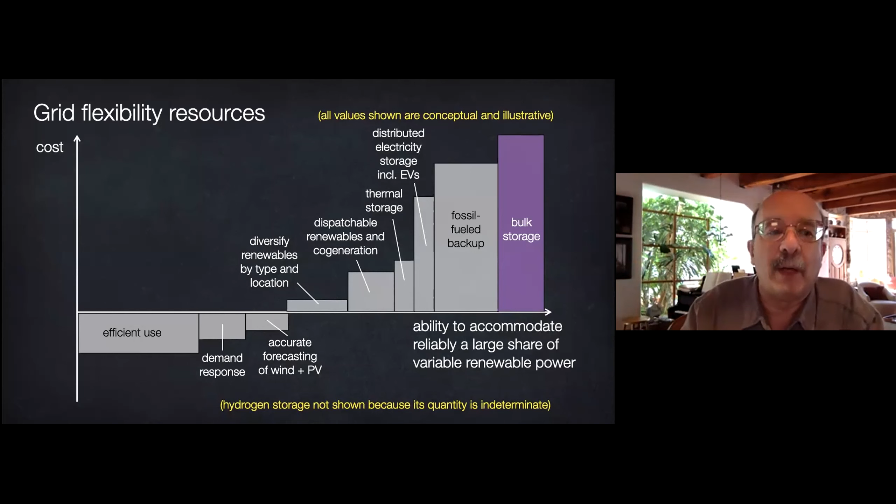Your actual costs will vary, but notice that bulk storage comes last, not first. It's the costliest of these options, so we needn't wait for a storage miracle, though some are emerging, and the market isn't waiting. Some folks wonder how the grid can reliably, gracefully manage the rapid evening ramp up when solar output fades, just as folks get home and turn stuff on, the infamous dead armadillo curve, or duck curve in California.

RMI's hourly simulation for ERCOT in summer 2050 solved this problem by systematically combining 8 kinds of demand response that add up to about 3 times more than previously assumed. They engage electric vehicles, home plug loads, residential and commercial hot water, plus heating and cooling controls.

Pressed one too many buttons.

And together, these can cut the summer daily load range in half, make renewables a third more valuable, save a quarter of the non-renewable capacity, and pay back in about 5 months.

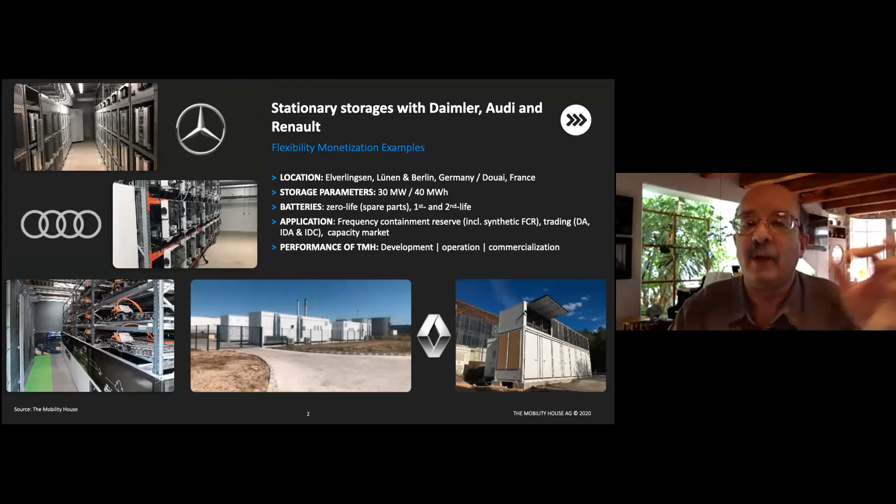In fact, the firm is building a 100 megawatt portfolio of stationary storage in Germany, Holland, and France. Here's the first 30 megawatts, all using battery packs that are in the EV business, but not currently driving cars. And even 3 years ago, this integrator installed the first electric car approved as a power plant on the German grid, able to get paid for providing frequency stabilization services.

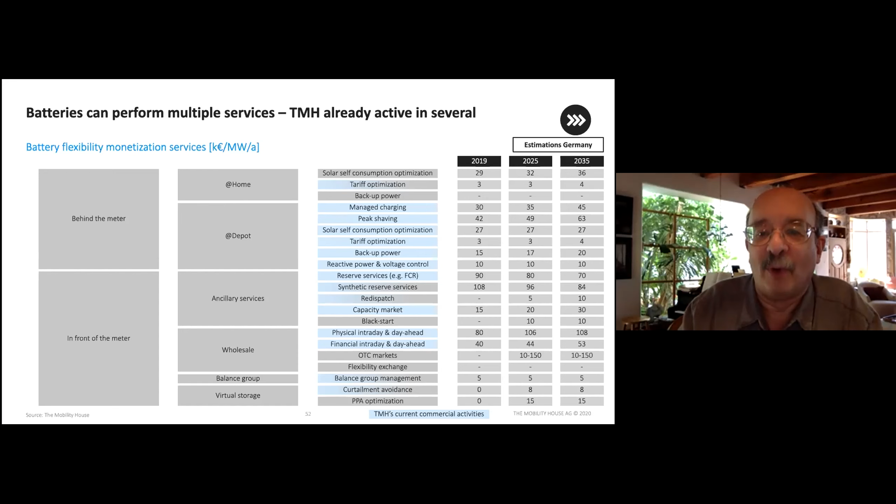Of 21 services that stationary or mobile batteries can provide, the Mobility House is already commercially active in 10 and launching 3 more. And a bidirectional EV in Europe is expected to yield $800 in annual operating profit, building on the original profit stream from EV-derived stationary storage.

Their four-country revenue in the past 3 years has averaged €1,000 per battery per year, with 1,500 EVs, 15 megawatts under management, 120 sites, 4,500 spare or used batteries from 4 automakers totaling 35 megawatts. Watch this space, jump in, do it in Texas.

Meanwhile, efficient and electric autos are morphing from PIGs, that is personal internal combustion gasoline steel-dominated vehicles, to SEALs, shareable electric autonomous lightweight service vehicles. These 3 changes in technology and 2 in business model are all simultaneous, mutually reinforcing, vigorously in play, and sped by smart policies and strong commercial ambitions in India and China.

Meanwhile, designing cities around people, not cars, yields more vibrant, healthy, wealthy, and pleasant communities with a third less concrete and two-thirds less driving. Now, incumbent energy suppliers feeling competitive threats understandably focus on the need for price to exceed cost. But many forget the other part of the business condition, that value must exceed price. If competitors offer a superior value proposition and run off with your revenues, it doesn't matter if you can profitably sell what your ex-customers are no longer buying.

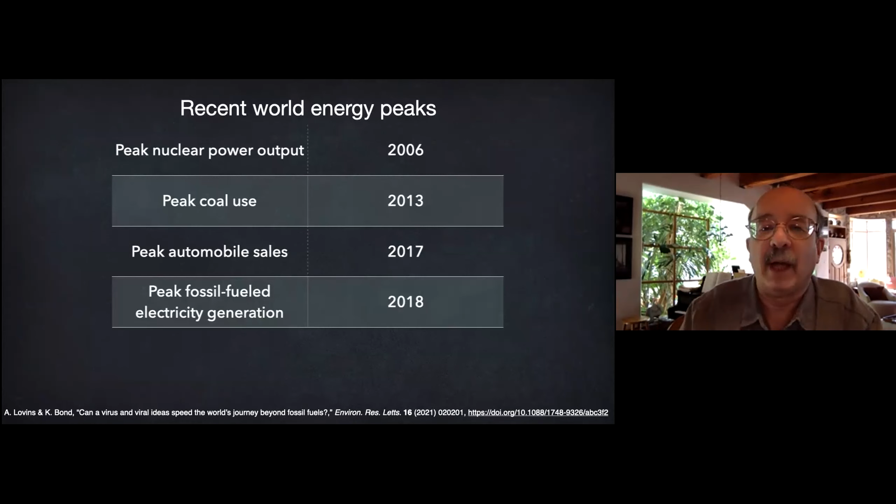But now this collapsing value is spreading to oil and coming next for gas. Peak nuclear power, peak coal, peak auto sales, peak fossil power have already happened. More electric autos were sold in 2019 than the annual growth in total auto sales at their 2017 peak, so fueled autos are now in their 4th year of shrinking sales. Last year, global plug-in auto sales soared 43%, while total auto sales fell 14%.

The International Energy Agency says last year's pandemic slump undid energy's previous 4 years of growth and CO2's previous 9 years of growth—twice the total of all previous drops since World War II. But renewables kept growing and even accelerated. So by the time demand recovers, if it does, renewables will probably have expanded enough to supply any future growth, tipping fossil fuels into permanent decline. Therefore, peak oil, peak fossil fuels, and peak CO2 emissions probably all happened in 2019.

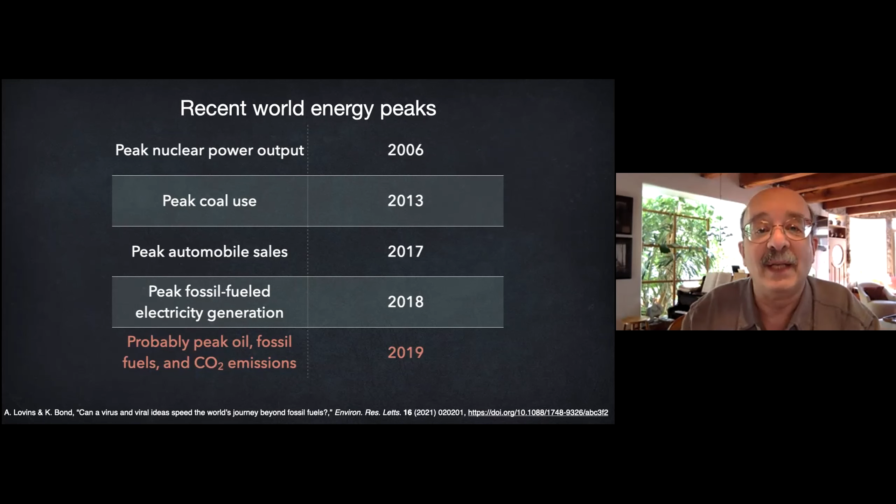Further speeding energy savings could accelerate the self-reinforcing capital flight from incumbents to insurgents. Some of that speed may come from deeper, cheaper energy savings through integrative design. Its contagious, visually transmissible ideas might spread at the speed of YouTube and Twitter, perhaps rivaling even the speed of scaling solar power.

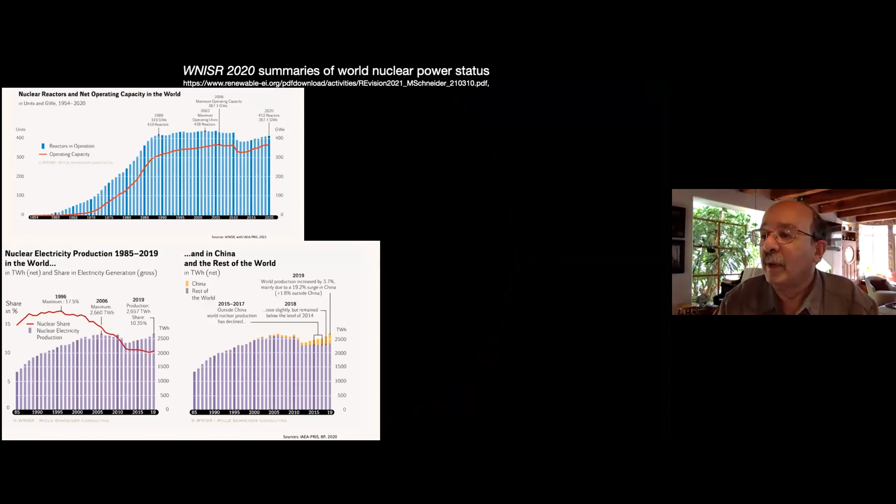Oh dear, no, down to the lower right corner.

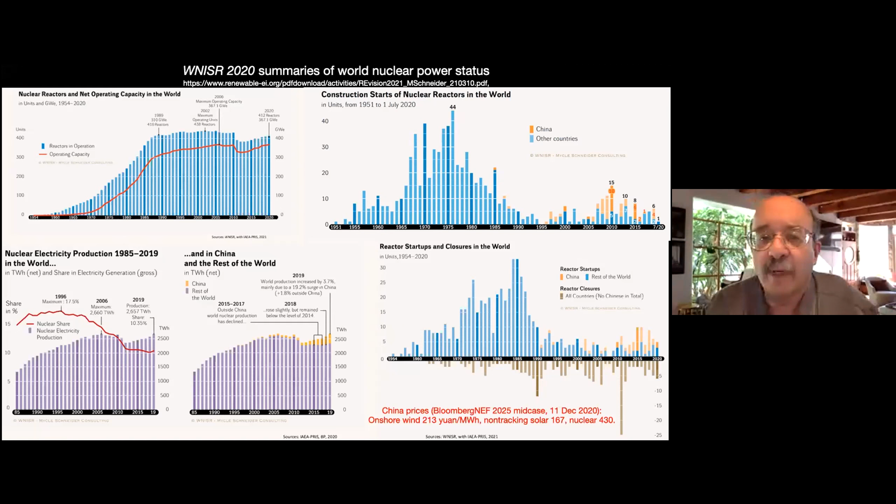Bloomberg says in the 2025 mid case, based on projects now being planned and financed, onshore wind costs less than half as much as new nuclear, and non-tracking solar is even cheaper than that.

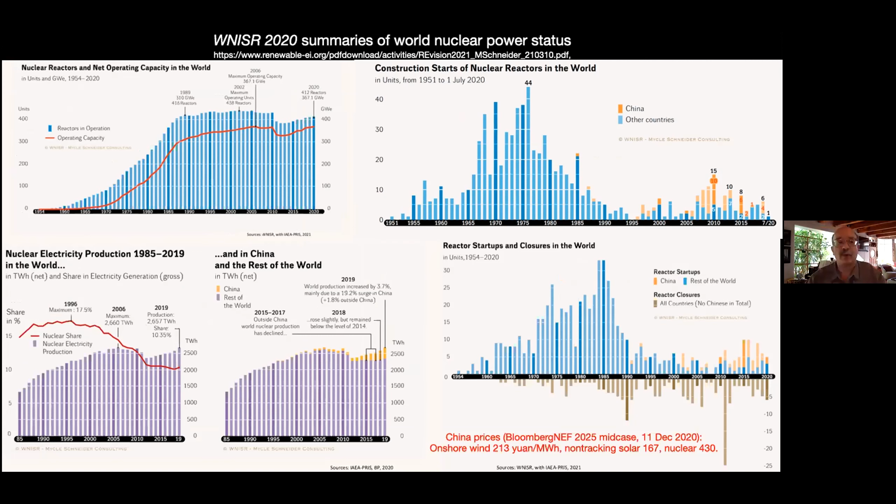If you actually look at the 14th five-year plan and the most recent announcements from the National Energy Administration of China, which actually sponsors RMI's Beijing office, we're very active in energy there.

You will find that yes, they are still building coal plants, because of pressure not from the central government, which doesn't like this at all, but from provincial governors and municipal mayors who want to protect jobs or meet their GDP growth targets. And they do that by doing what they are good at and have done before.

But the run hours of the existing coal fleet keep dropping. I think they just dropped 2 percentage points in the past year. They're well below half now, and they're losing money. More of them are going broke. So the coal plants being built are all pre-stranded assets, and it's just a question of bureaucratic momentum.

And the political complexities of China. There's an old proverb, tian gao huang di yuan, heaven is high and the emperor is far away. So we do our thing in our province, Beijing's way over there. We don't pay so much attention.